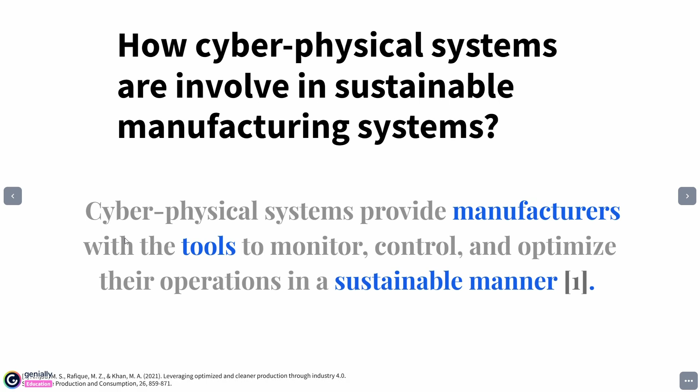As I was telling you, our research unit works a lot on developing technologies to allow companies to improve a series of factors. Some of the projects we are going to discuss today are the bioprinter being developed by Dr. Isaac Chaires, collaborative robotics for construction by Dr. Alejandro Hernandez, machine learning in business models for circular economy by Dr. Christopher Muñoz, and Julian Ramirez is going to present the part of non-destructive analysis of materials.

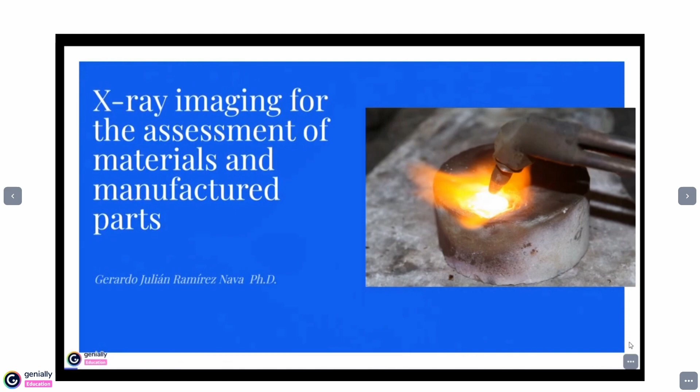So this is the first project, from Dr. Julian Ramirez. The physical features of manufactured products in the casting industry depend mainly on the characteristics of the materials they are composed of, and internal and external processes used in their manufacturing. As part of quality assurance and compliance demonstration, manufacturing elements must demonstrate the fulfillment of quality criteria set in standards and normative.

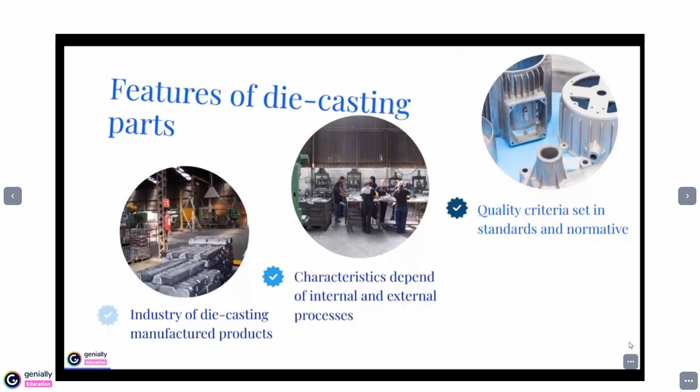There is a wide range of studies and techniques for inspecting materials at different levels. Commonly, these techniques are divided into two main groups: destructive tests and non-destructive tests. Both tests have advantages, disadvantages, limitations, and are not used solely. In fact, they are complementary for quality control, safety, and reliability of manufactured products.

Destructive tests modify the properties, structure, or geometry of the examined parts, damaging the elements and causing deformation or breaks that make them invalid for later use. Considering this, these studies are carried out on a representative sample of the material.

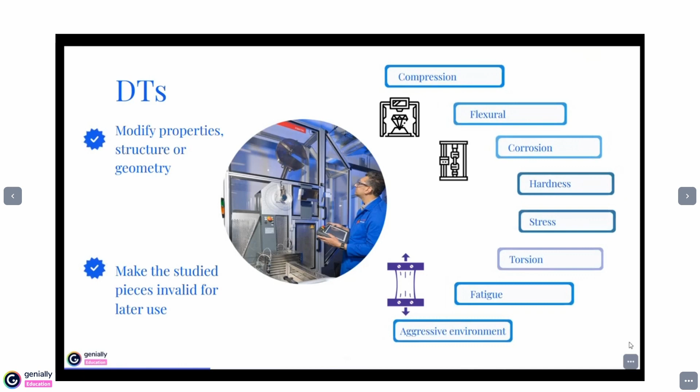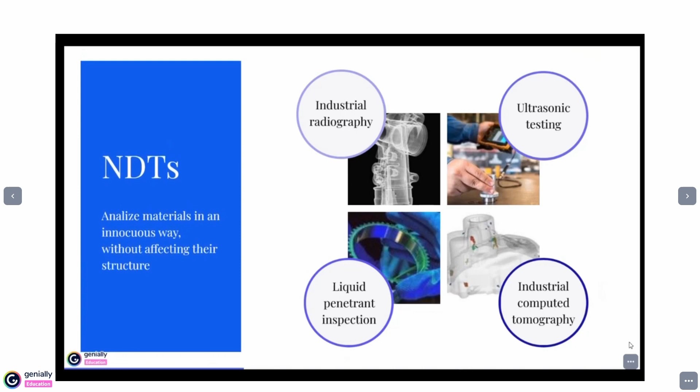Unlike destructive tests, non-destructive tests are carried out on materials in an innocuous way, without affecting their structure or shape, leaving the elements intact after completion of studies, letting them be used in the future. Industrial radiography is a non-destructive test used for inspecting materials to see and evaluate the internal structure of elements by using the ability of ionizing radiation such as X-rays, gamma rays, and neutrons to penetrate materials.

Industrial radiography allows the inspection of objects without causing any damage, providing highly detailed images of their internal structures, enabling precise evaluation of objects. It is mainly used to inspect and identify defects such as cracks, flaws, difference in density, and porosity that may not be otherwise visible.

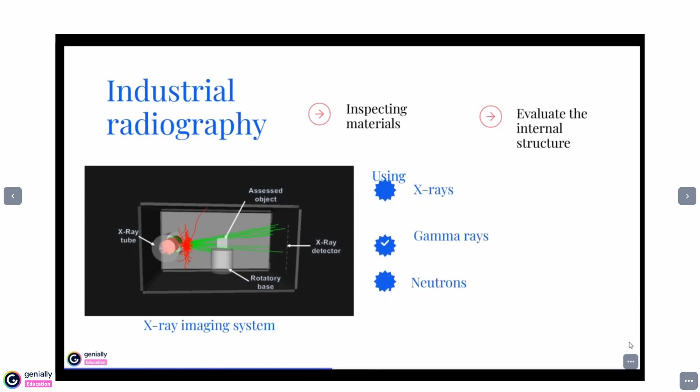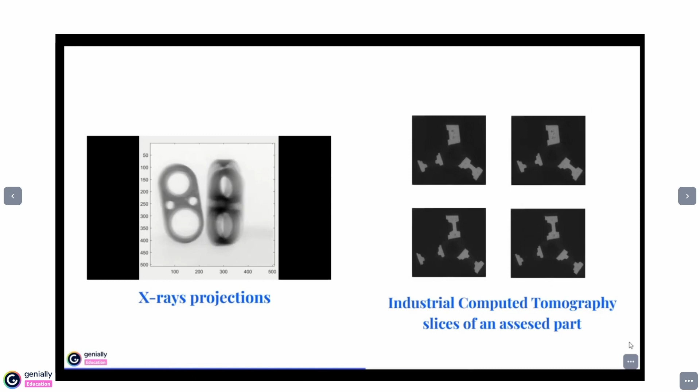Some of the advantages of industrial radiography are the saving of time and money compared to traditional inspection methods, the wide range of materials that can be assessed, and the immediate results, which allows quicker decision making and prompt corrective action. Despite these features, the information obtained depends on the orientation of the assessed piece and the X-ray beam, causing possible overlapping of structures which may lead to misdetection of defects and material discontinuities.

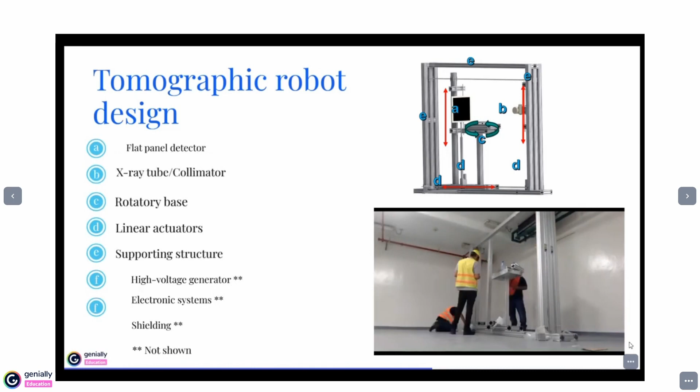An alternative method derived from industrial radiography is industrial computed tomography. In this technique, the element studied is rotated inside the X-ray beam, obtaining radiographies at different angles. This information is processed through a reconstruction algorithm to obtain the three-dimensional representation of the object in slices of small elements known as voxels. In contrast to industrial radiography, industrial computed tomography gives more detailed information.

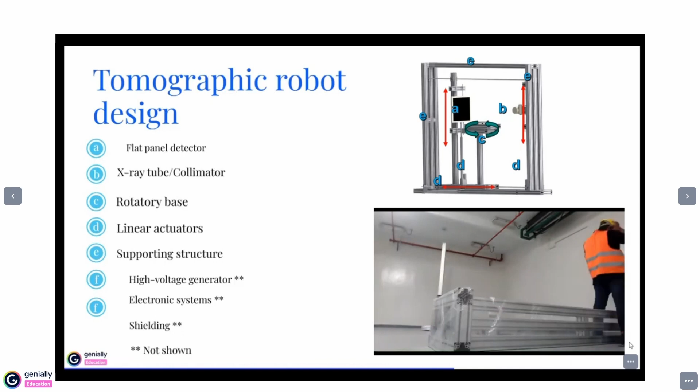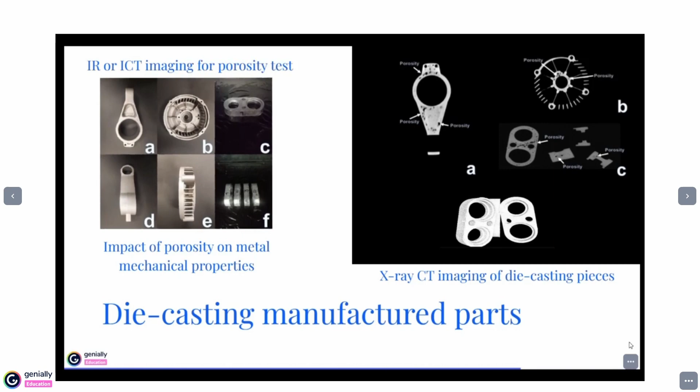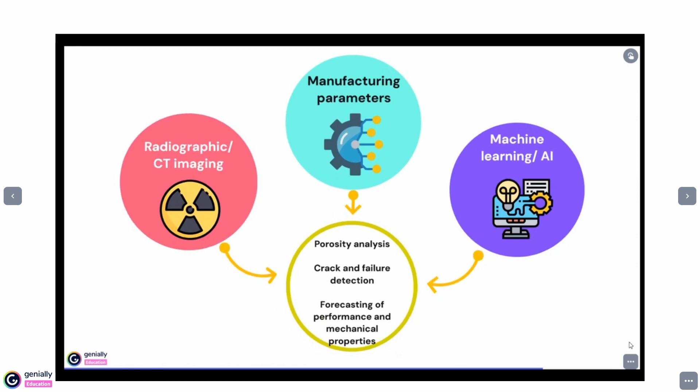A common defect that can be assessed by industrial radiography or industrial computed tomography imaging is porosity. Porosity appears in many cast metal components, although it is especially prevalent in aluminum and magnesium die castings. Unfortunately, casting porosity inherently affects every link in the production supply chain, as it is present in different degrees in all castings. Industries such as aeronautics and automotive, where safety standards must be met, seek to reduce the degree of porosity in the parts of their products, since this could have an impact on their mechanical properties and result in increased fragility of the components.

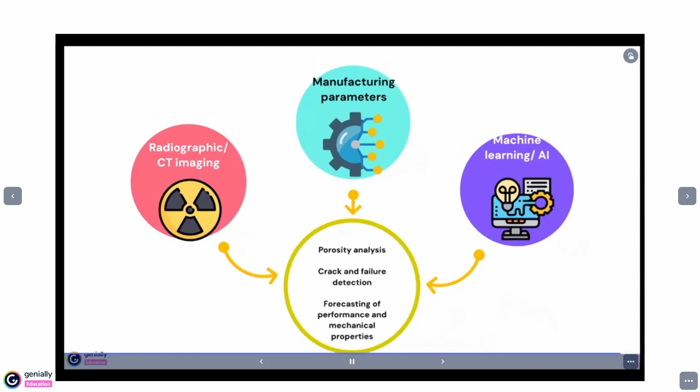The development of machine learning algorithms for the assessment of porosity and other defects in casting products can solve several problems that affect the supply chain. It can also contribute to reduce waste of materials, electricity, technical, human, and economic resources. Automation processing can also be benefited, reducing the time of analysis, speeding up decision taking in premature stages. The algorithms can impact positively in industries such as the automotive, aeronautic, and spatial, where mechanical parts are crucial elements for the development.

An important part of this project is that we are already building the tomography device in Campus Ciudad de Mexico, and also the idea is that we are going to put this tomographic system in a line of production in a company that is in the state of Hidalgo. So that is the next step that we are looking for.

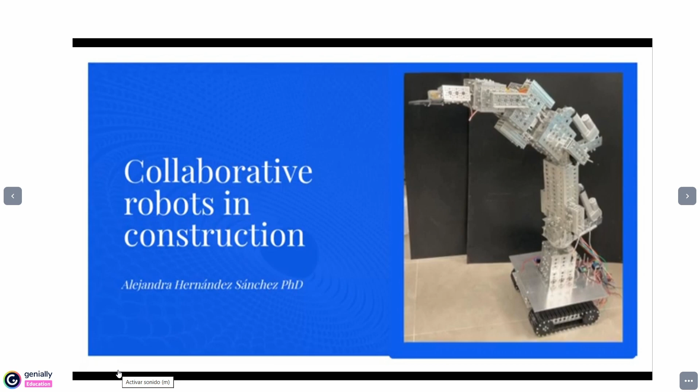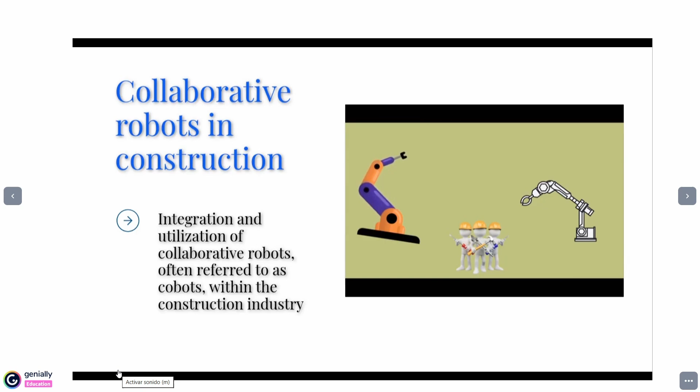This project, actually, I needed to advance. So this project involves a cutting-edge system that comprises a robotic arm and a mobile platform. The integration of these two robots can handle construction materials such as bricks from different shapes and sizes, and also construction rod.

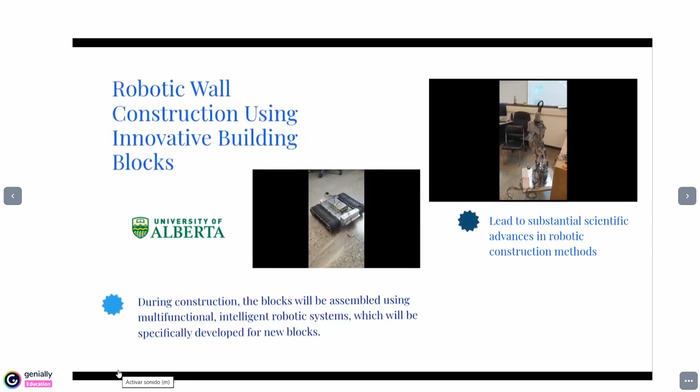So among other things in construction that it can handle, it's important that it could be used for traditional construction, aiding construction workers, or for prefabricated construction. That is another advantage of this project.

And in order to develop this robot, well, we employed advanced computer vision techniques to identify the bricks that need to be picked up by the robot. Then information is sent wireless via Bluetooth to the robot, and it triggers a signal inside the robot, then the robotic device is put into motion.

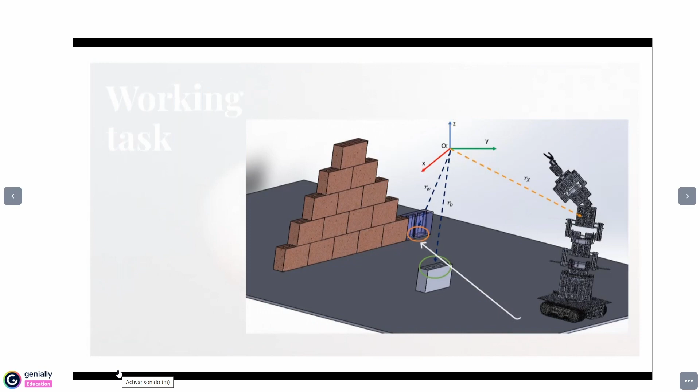So the first step is that the robot is set into position and orientation, where it needs to be. The next step is that the robot locates the brick, picks it up, and puts it also into position and orientation, and then sets it where it needs to be. In order to do so, we perform several numerical evaluations of every aspect of the controller.

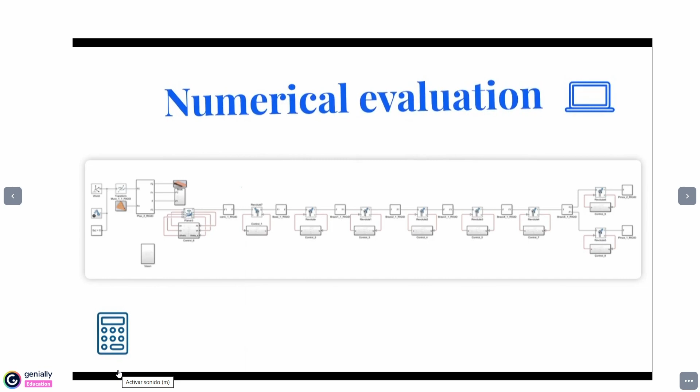In this case, the controller is a super twisting algorithm. The first part was designed in MATLAB Simulink, but now we are trying to put the same algorithm into a developer board so it can control the robotic arm.

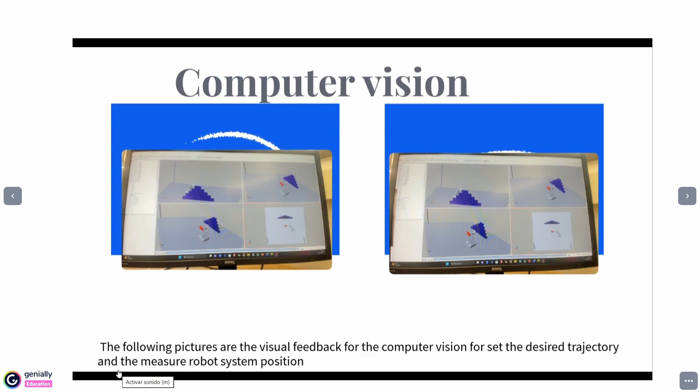Also, we employ image processing and webcams to gather the critical data around the construction field. This allows setting the robotic arm into position. We have also performed some benchmarks against a PID controller versus the super twisting algorithm, and these are the first results that we have. Here you can see how it's following the trajectory.

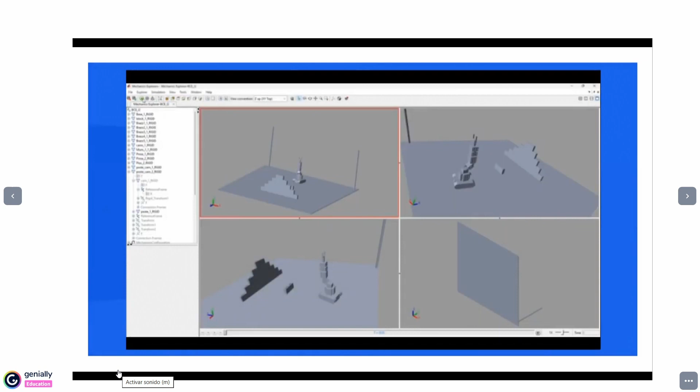Also, now that we have finished those first steps of the robotic device, we are going to put it to work in a collaborative way with a Universal 20 robot, and we're going to set a task to perform between the two arms. So this is the next step of this project. So that will be all for this one.

Okay, so this next project is from Dr. Isaac Chaires, and it's about the building of a bioprinter.

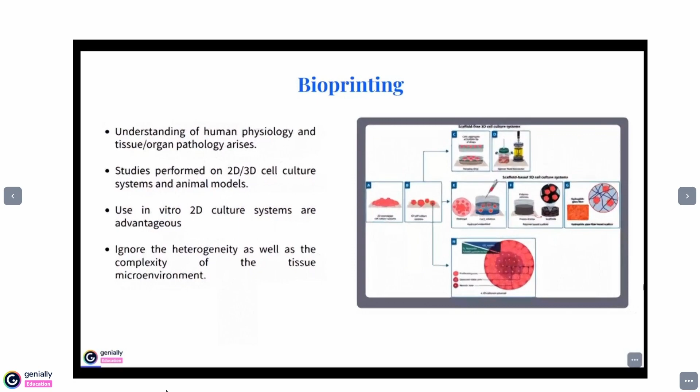Today, most of the understanding about human physiology and tissue organ pathologies comes mainly from studies performed on 2D or 3D cell culture systems, which are commonly based on animal models and cells. When these studies are performed on 2D culture systems, the advantages are clear - for example, the simplicity, repeatability, and the clear understanding of how the cell's physiology is driven by the culture conditions. Nevertheless, we cannot follow exactly how cells will behave on a 3D construct like tissues or organs.

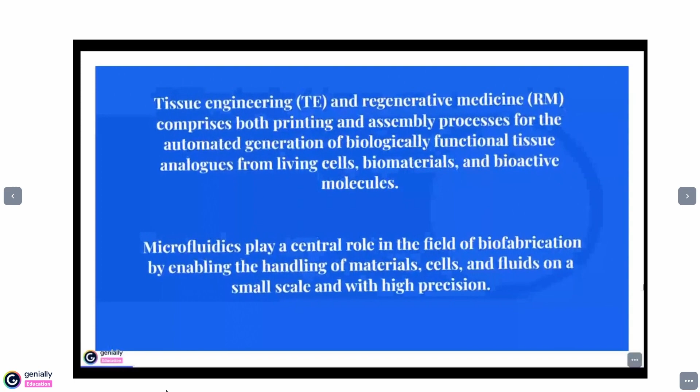Therefore, in the last decade, the so-called tissue engineering technique and regenerative medicine are bringing new printing and assembling processes that can generate biological functional tissue analogs based on living cells that can be deposited on biomaterials that will support their lives, and then based on some bioactive molecules, we can keep them fit, with the aim of creating a replicate of human organs. Even though we cannot consider microfluidics like a bioprinting or bioassembling process, microfluidics is playing a central role in the field of biofabrication because this will help us transfer nutrients to cells.

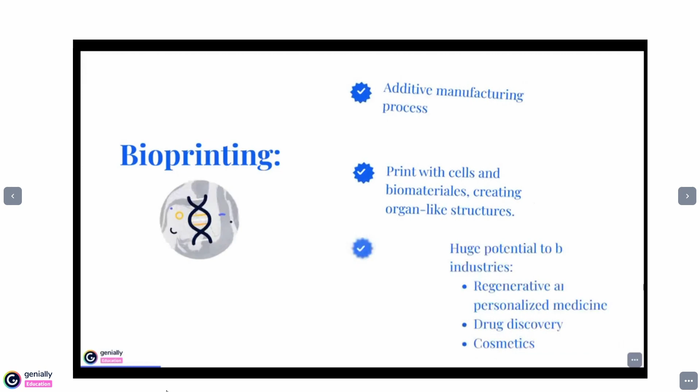Bioprinting by itself is an additive manufacturing process which is quite similar to 3D printing because it uses a digital file as a blueprint to create the object layer by layer, following the traditional strategies presented in 3D printing systems. Unlike traditional 3D printing systems, a bioprinter will print actually cells and biomaterials together or sequentially, creating an organ-like structure that lets living cells multiply.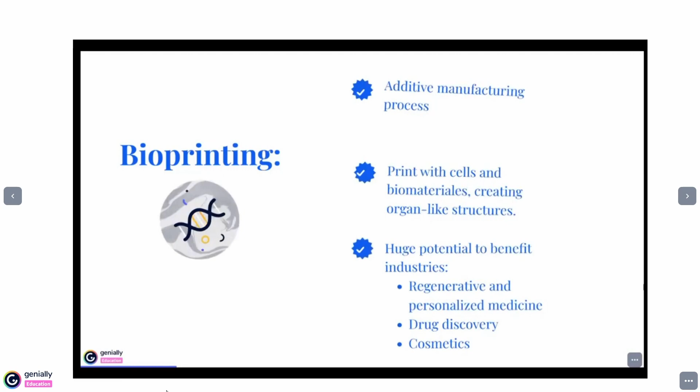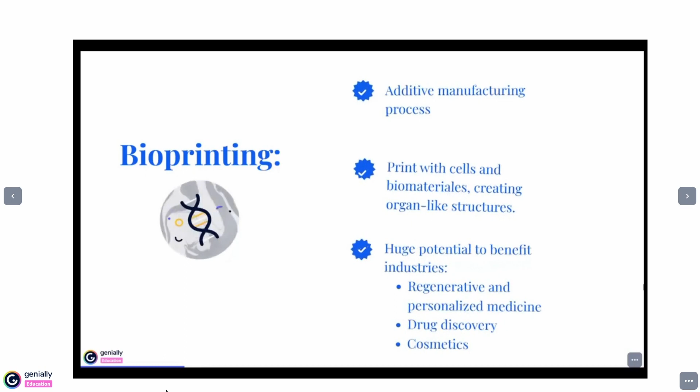Also, bioprinting is a relatively new technology. Only maybe 20 or 10 years ago did the first really interesting results appear. It has huge potential to benefit industries like regenerative and personalized medicine, drug discovery, and cosmetics.

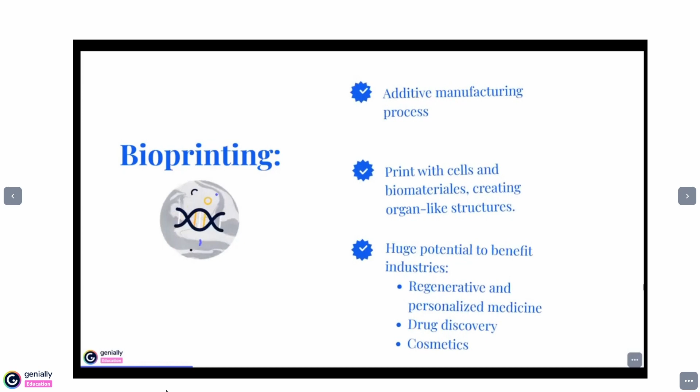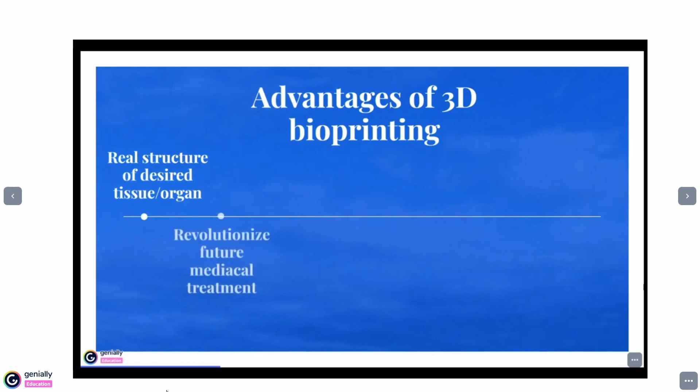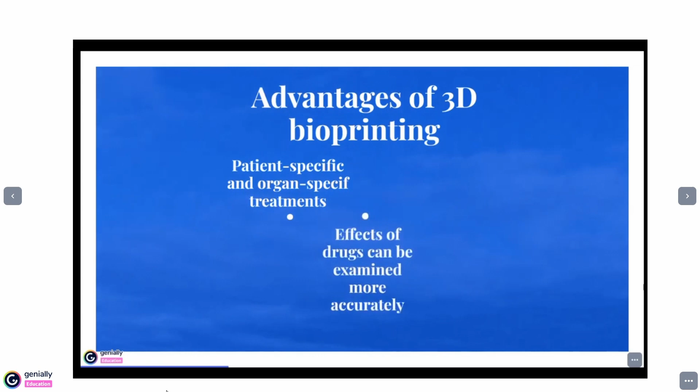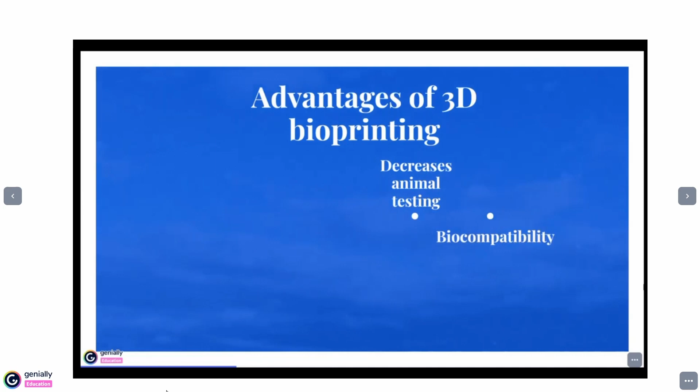The advantages of 3D bioprinting include mimicking the real structure of the desired tissue, the possibility to revolutionize future medical treatment capabilities, the possible creation of patient-specific and organ-specific treatments, effects of drugs that can be examined more accurately, decreasing animal testing procedures, and increasing biocompatibility with human cells and tissues, as well as automating a complex process concerning 3D constructs based on living cells.

The disadvantages, of course, do exist. 3D bioprinting is characterized by being highly costly - it's indeed an expensive technology. It's quite complex still because we need to develop more advanced technologies that can contain, deploy, and maintain living cells in an artificial construct. We need to maintain the cell environment, which can be a difficult task to resolve. For sure there will be ethical concerns and energy consumption limits.

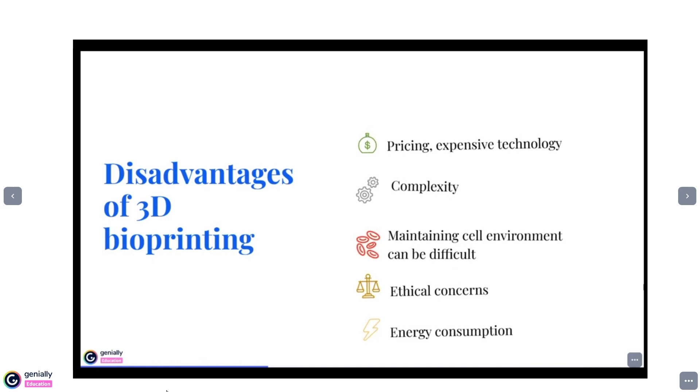Bioprinting combines a lot of processes that come from the physical cross-linking needed to create the bioink, how we will deploy the molecule that will form the synthetic basal support to deploy cells and create what is called a synthetic scaffold, and then the system that will deploy cells in a controlled manner following a predefined structure. Of course, this should all be combined together in a culture system that will keep the environment conditions in order to provide the best conditions for keeping cells alive in a specific combination of biomaterials, cells, and molecules.

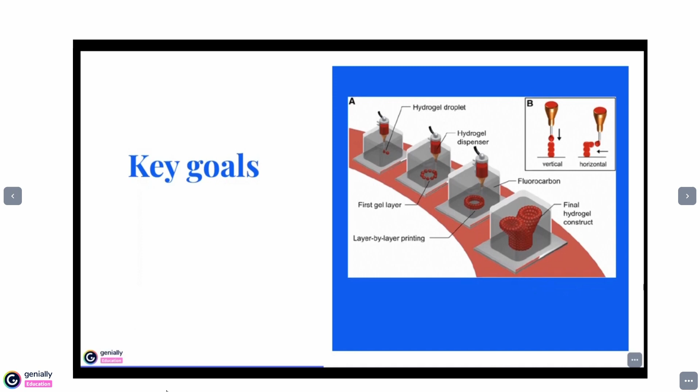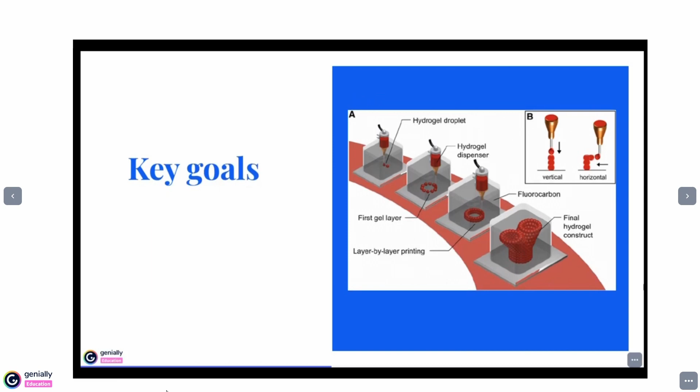Bioprinting has many goals. Among the main ones, we can consider the construction of self-sustainable biological devices that can lead to constructing organ-like forms that could look like, for example, a vascular tissue or kind of intestine or similar conductive organs that we have in the body.

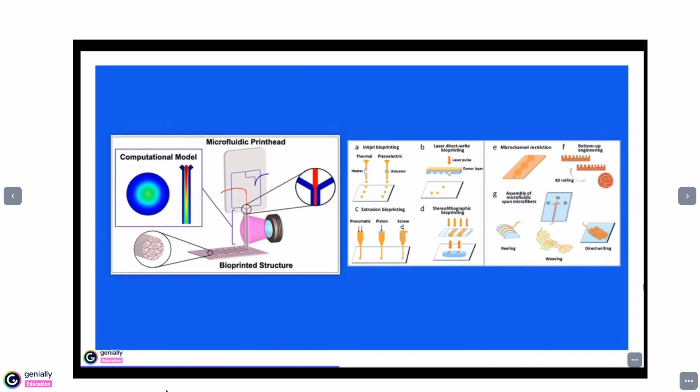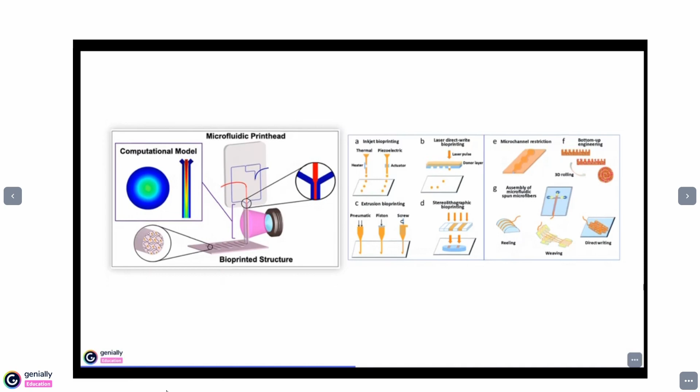Of course, there are some other issues related to the technology we are using to create 3D bioprinting systems, including how we are deploying the material inside the extruder or the equivalent technique that we are using to deploy cells and biomolecules and so on. We also need to be worried about the fluid effects that we will have when we are dealing with the application of bioinks.

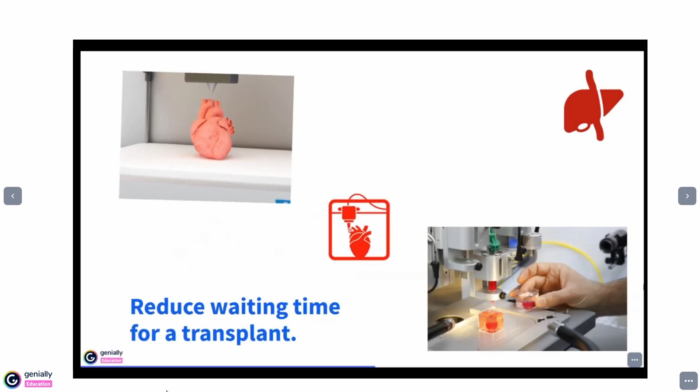At the end, what bioprinting is looking for is the creation of organs that will have the opportunity to be a replacement for human beings who are suffering from terrible illnesses and who will require, for example, a transplant of heart, kidney, liver, and so on.

Another technique we are trying to develop is the creation of mimics of tissue, in particular tissue that could be removed because the human being could have had cancer, for example, and when they need to graft the tissue, it's possible to create this new material that will contain cells and that can replace at the end what the restricted space needs.

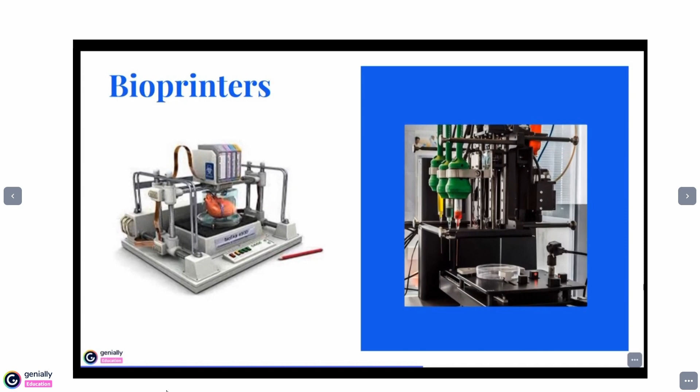And replace the removed tissue that was damaged by illness. All these procedures are possible because we can use this bioprinter system that can complete all the processes we need to create this artificial tissue that should be deployed on the scaffold.

We have developed in our research group several bioprinter systems. We started with one that can print curved platforms, because we need curved surfaces to deploy cells that will follow the structure of an organ common in the human body.

This bioprinter was developed with the aim of creating predefined curved surfaces, completed several years ago, and already tested, showing that we can keep cells alive for long periods over these curved surfaces.

The size of this bioprinter system is about 50 by 50 by 50 centimeters, which helps us put this bioprinting system inside a regular environmental condition that is usual to culture cells in a regular shape or form.

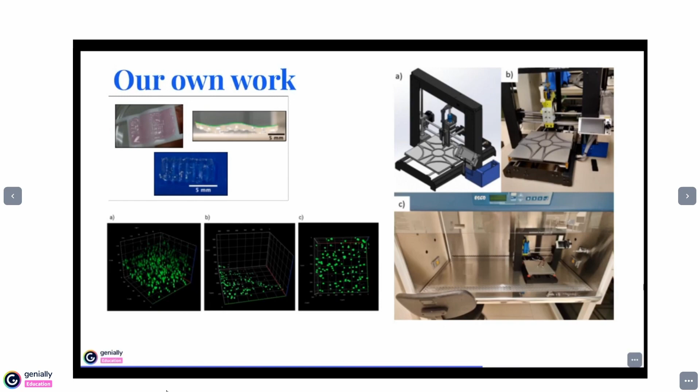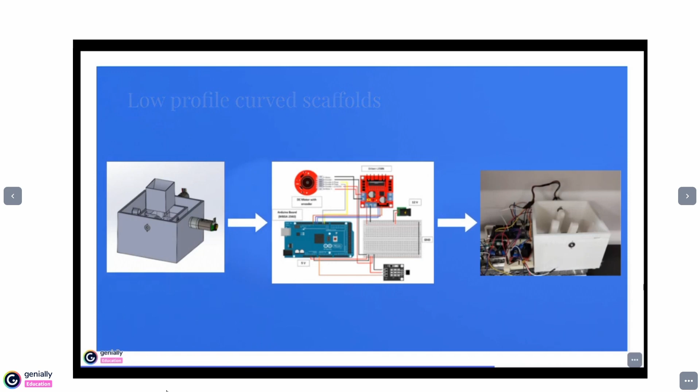We are also developing different kinds of bioprinter strategies and devices that could, for example, create curved surfaces using a strategy to deploy cells on curved structures without needing that big 3D printer system I showed before.

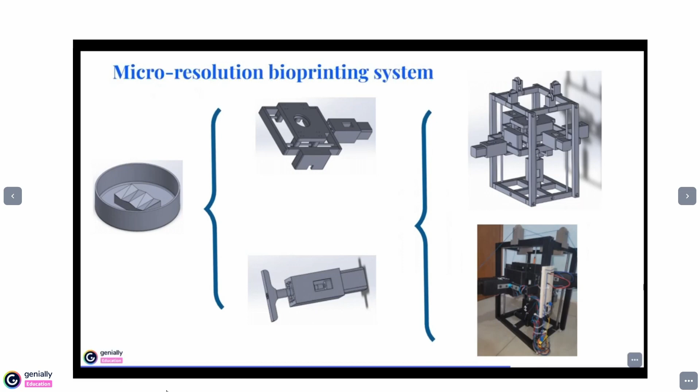We are also developing 3D printers that will have nano or micrometric resolution. This strategy will help us create more precise forms for the tissue we are trying to deploy or develop, depending on the application.

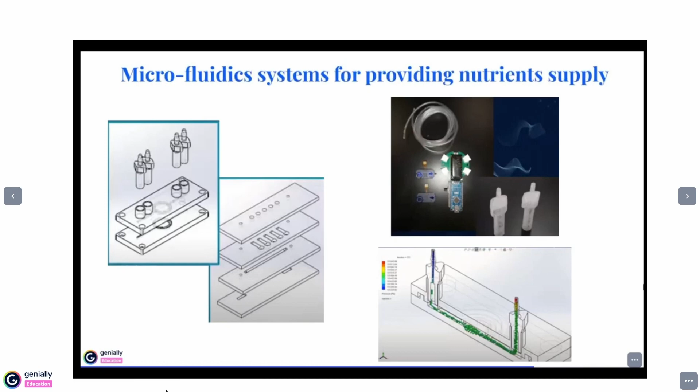Besides, we are creating our own prototypes for controlled microfluidic strategies, especially those that can be inserted in a 3D bioprinting scheme. That includes the technology, the control system, the instrumentation, and the design of the circuits we will use to conduct the fluids that will carry the molecules the tissue will need.

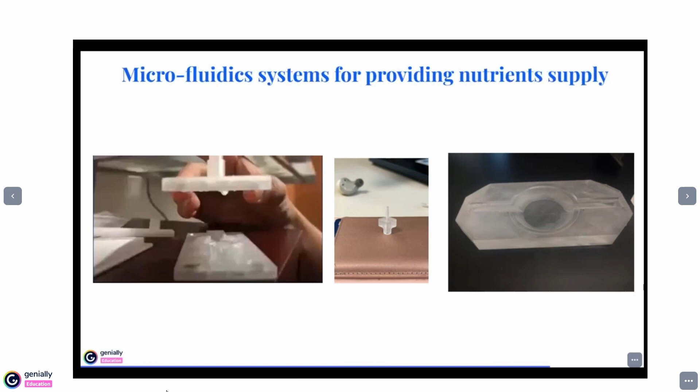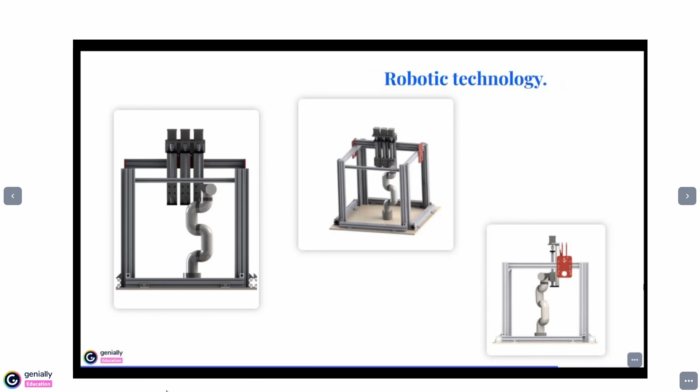Finally, we are bringing new robotic technology that combines a robotic arm and a multi-model extruder that could create complex tissues, complex shapes that may correspond to organs or tissues that better match what we have in the human body.

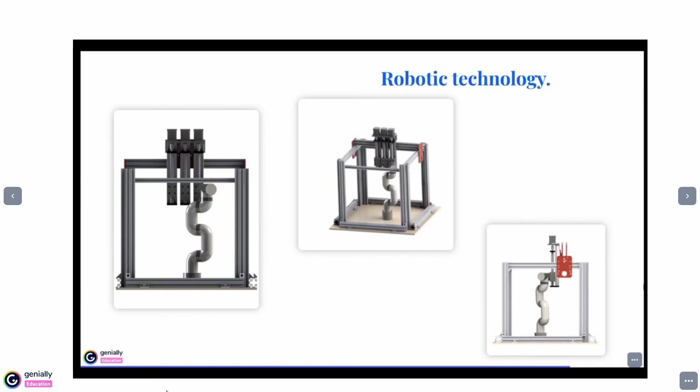We are also developing our own robotic arms that could substitute traditional commercial ones, with the aim of having technology that could be deployed in different areas of the country, removing one of the most important disadvantages of 3D bioprinting systems: the cost.

So we are dealing with this new technology in robotic arms that could be included as part of a bioprinting system that we expect will become a scheme used in new bioprinters we are developing in the research unit.

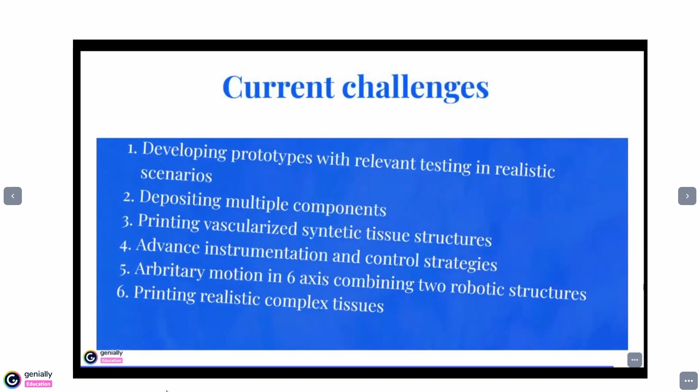Our current challenges include developing prototypes with relevant testing in realistic scenarios. We are working on a way to deposit multiple components in the tissue to print vascularized synthetic tissue structures, and to create advanced instrumentation and control strategies for the devices we are creating.

Also, we need to develop an arbitrary motion robotic system that could combine a six-axis at each robot, giving us the chance to create much more complex structures that can actually look like an organ.

In the end, what we will try to do is print realistic, complex, multi-component tissues that are vascularized and mechanically predictable in terms of their properties. So this is what we are doing in the research unit about bioprinters, and thanks for listening.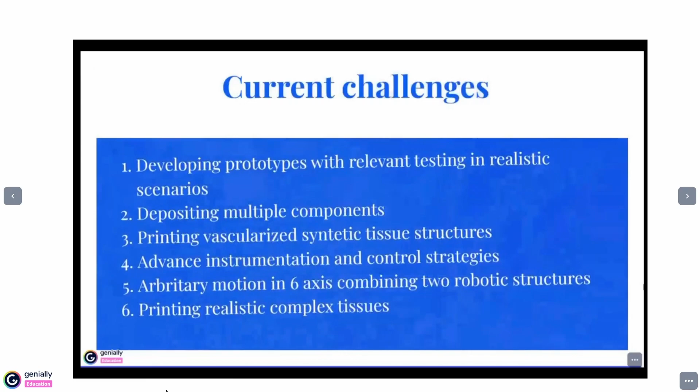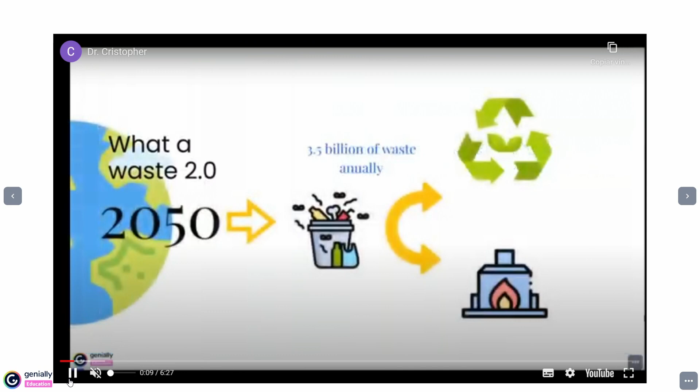This project is in collaboration with other research units of the Institute, and it's really interesting because it was motivated by the fact that, according to the Food and Agriculture Organization, there are about 10,000 tons of bio-waste every year, especially here in Mexico, representing about 37% of total agriculture production. When you have that amount of bio-waste, you need to find ways to convert it into something else. So the idea behind this project is to develop business models to treat that bio-waste. In which sense do we mean that? The project works in the following way.

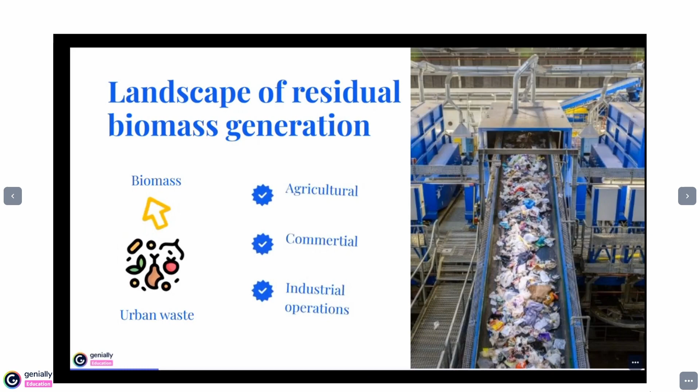First, we are going to develop a full database of all the common bio-waste that can be found in Mexico. For this, we are going to go to retail stores like Walmart, Oxxo, Sam's, whatever you find.

We're going to pick all that waste that you can find in there, and we're going to characterize that waste. The challenge of this project is that there are a lot of products you can find, and the characteristics of each one change a lot.

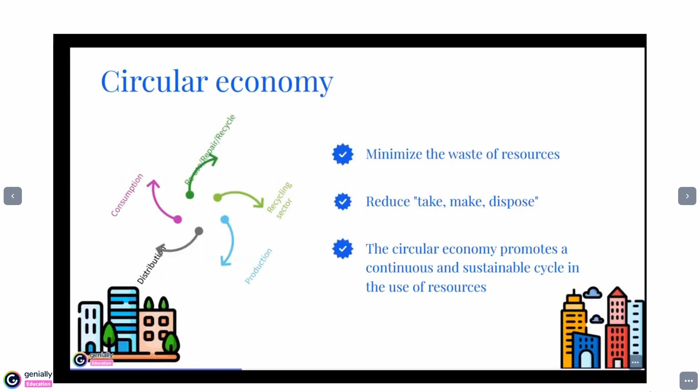So the second step is to find what we can do with that bio-waste. That integrates the second part of the database. In this section, we find the possible routes for conversion of the waste that we have. Then the third part is, once we find the possible routes, we need to develop the model.

In which we predict gas emission of the process, the profit of the process, and sub-processes associated to each product. The third part of the project came with implementation of hybrid models based on common decision-making models for business models, integrating machine learning.

Up to now in this project, we are still building this huge database that contains both the characterization and the possible routes with costs associated to each process. But the next step will be to start putting more possible routes that we can use to change the bio-waste, not only the 3 that we have right now, but a lot more.

And the third process will be to put in the decision business models. But it's under construction, this project, and it's really interesting, actually.

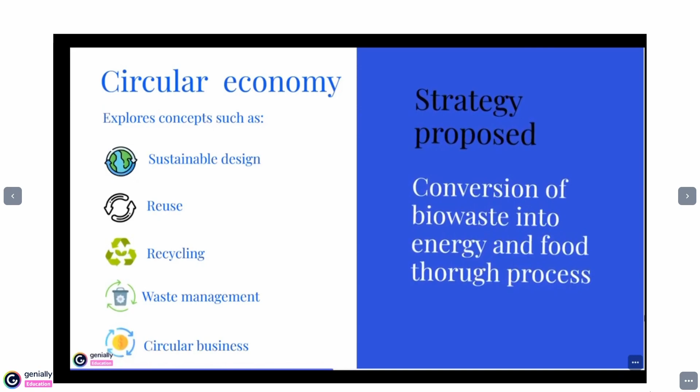Okay, so the next project that I'm going to present is about inverse design of new materials.

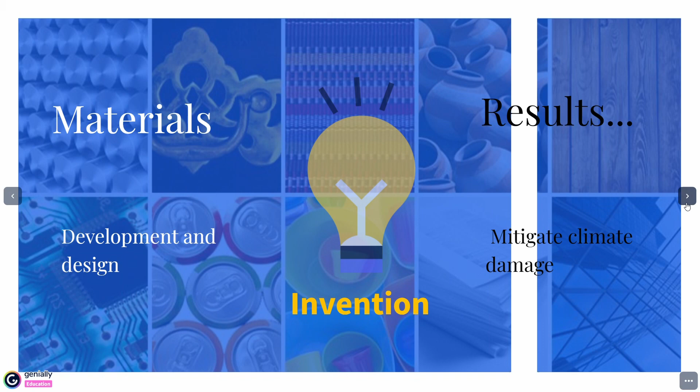Currently the demand for new materials is huge because it's related to mitigating climate change, and everyone wants to invent something new. So even though we have a huge demand for new materials, it presents a lot of challenges right now, but there are also a lot of opportunities.

One of the opportunities we have found is the implementation of artificial intelligence in the design development of new materials. So for this part, we're working with...

When someone is developing a new material, most of the time they perform a series of experiments, and sometimes they use commercial software to try to predict the compounds or the structure of the material and associated properties.

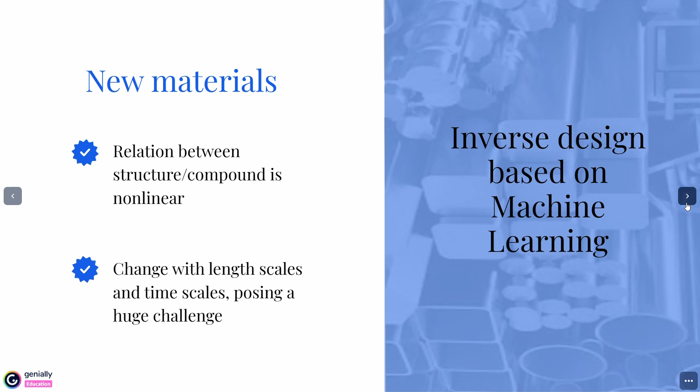But there is a huge problem in all of this because these relations are nonlinear, so sometimes the commercial software is not that accurate in the prediction.

So what we're trying to do here is apply machine learning algorithms to predict some of these relationships that we have between the structure of the compound, the structures of the materials or the compounds of the materials, and their property relations.

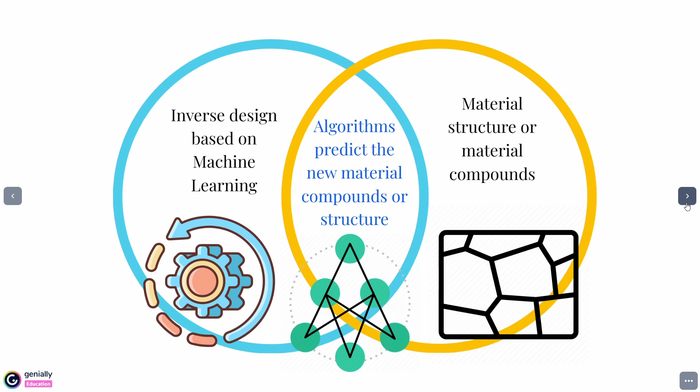So we're working with something we're calling inverse machine learning. First of all, we are working with a company, and we have found that applying this kind of technique has saved the company a lot of cost in the design of new materials, because it reduces the number of experiments they have to perform to create a new material.

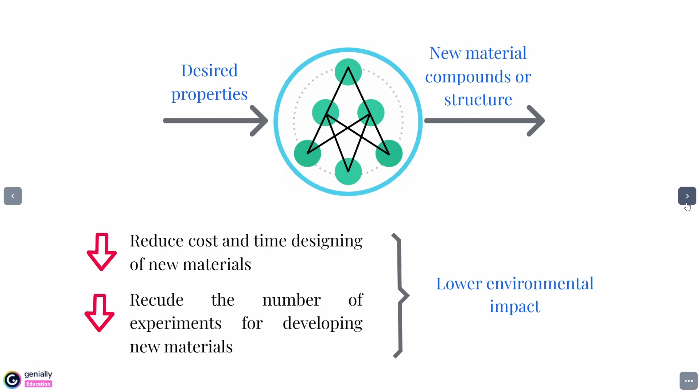Up to now, we are working with this company that works with polymers. They already had some databases of experiments. It was not a huge database, it was a small database. That was the first challenge that we found.

And the second part was to integrate this database that has the formula of the products and the properties that are associated with this product.

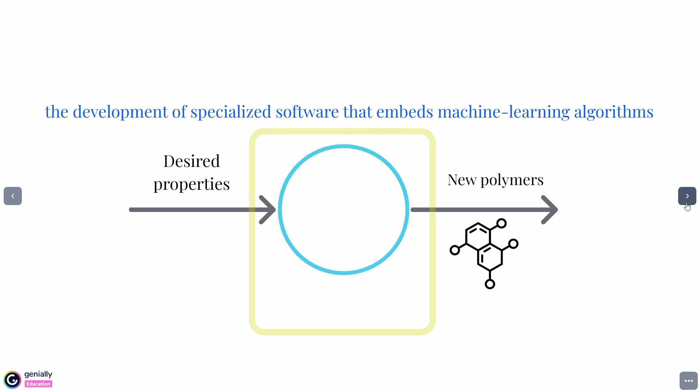What they want is to have the properties they are looking for in a new material, and through these properties, the algorithm gives them the formula, to try to reduce the number of experiments they are performing.

They currently use commercial software, and this software has about 10% error when predicting a new material. We have already applied 2 different kinds of machine learning algorithms here, and we have reduced this error to almost 0.00001 when predicting.

This is just running in the computer right now. The next step we are taking with the company is: we already have the 2 algorithms trained for this, so now we have to perform some experimental tests in the laboratory to see if the algorithm is predicting accurately. That is the next step with this company.

As you can see, as a research unit we have many fields of knowledge. We work in areas related to computer science, instrumentation, control engineering, robotics, and industrial engineering. But we don't do everything ourselves in the projects. We rely on strategic alliances with other research units from the institute, people from biotechnology and materials science backgrounds. Mostly what we do is the instrumentation of devices or the implementation of machine learning and deep learning algorithms.

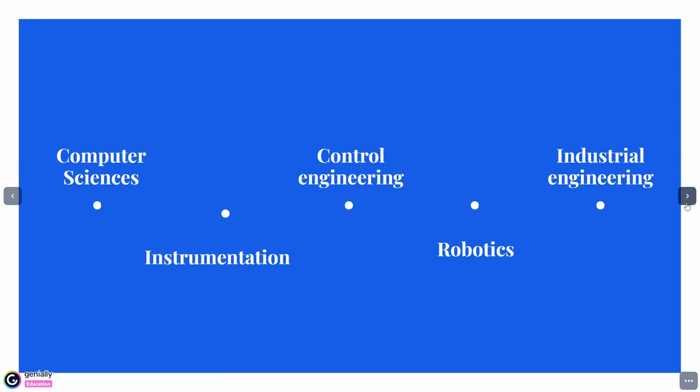As a conclusion, we find that cyber-physical systems are great tools for the industry. They allow monitoring, control, and optimization of processes and reduce environmental impact. Also, we don't perform any of the biological or chemical parts associated with the processes we presented here. There are other people, for example, in the bioprinter, who give us the ink that we use. We don't develop the ink, we just test it in the bioprinter, and that's all.